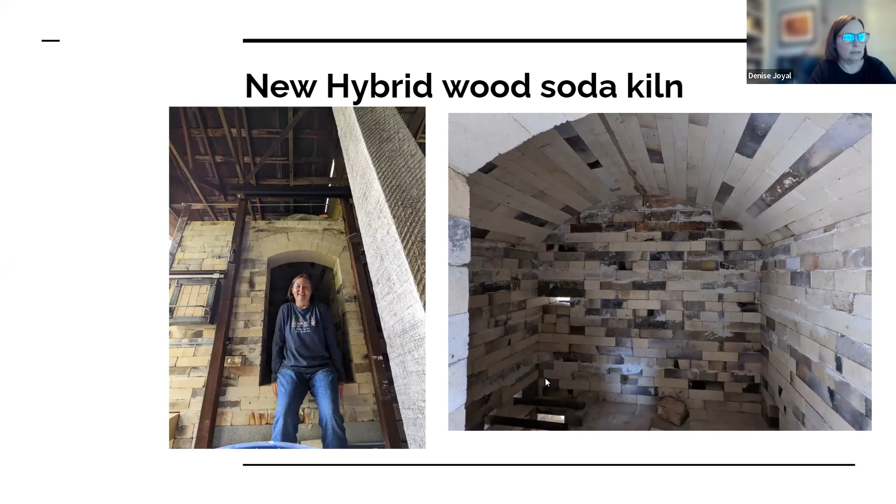The other thing I do here is because when I had a soda and wood fired kiln a little while back that was smaller than this one, I had to build channel extensions for the propane, since most of the ignition was happening towards the back of the kiln in the chimney. Propane needs oxygen to ignite, and it needs a little bit of time to fully ignite, so to get the most out of the fuel, you need a fairly long path to get that flame to fully ignite.

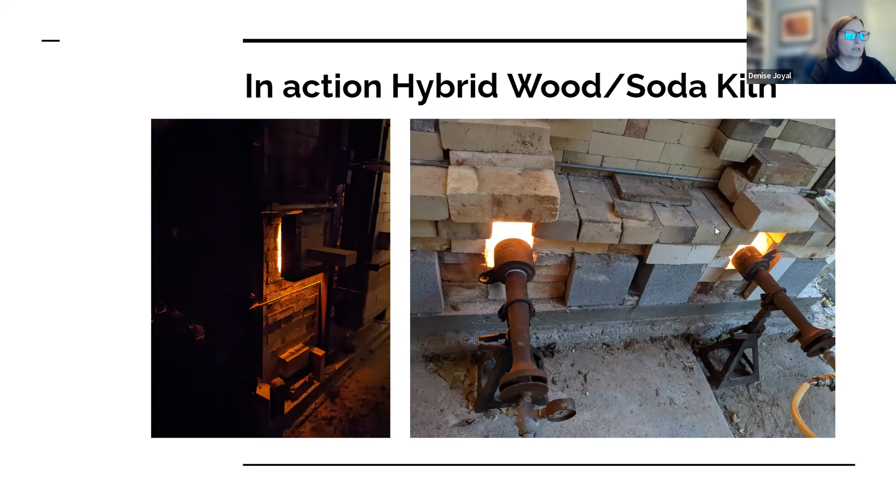A lot of people get excited when flames are coming out of their chimney, but I feel like I'm just putting money and carbon into the environment. I'd rather use the fuel in the kiln itself. So that's kind of the theory behind this method.

One of the things I wanted to show you was the CO2 workbook that I created as part of an article I wrote some time ago. This is an Excel spreadsheet, and if you request a copy, I can send it to you so you can use it yourself.

Essentially, this tells you how many pounds of CO2 result from a kilowatt hour, a gallon of gasoline, a gallon of oil, a gallon of propane, a cord of wood, etc. You can put in the amount of propane you use and the number of cords of wood or whatever, and find out what that number is.

For example, I have that calculation of 12.8 for one gallon of propane. So if I used 50 gallons of propane, that's 640.5 pounds of CO2. I'm adding that to a cord of wood, since that's about what my kiln used in my last firing. So that's my CO2 output, and then I divide it by my cubic feet of stacking space so I can see my carbon usage per cubic foot.

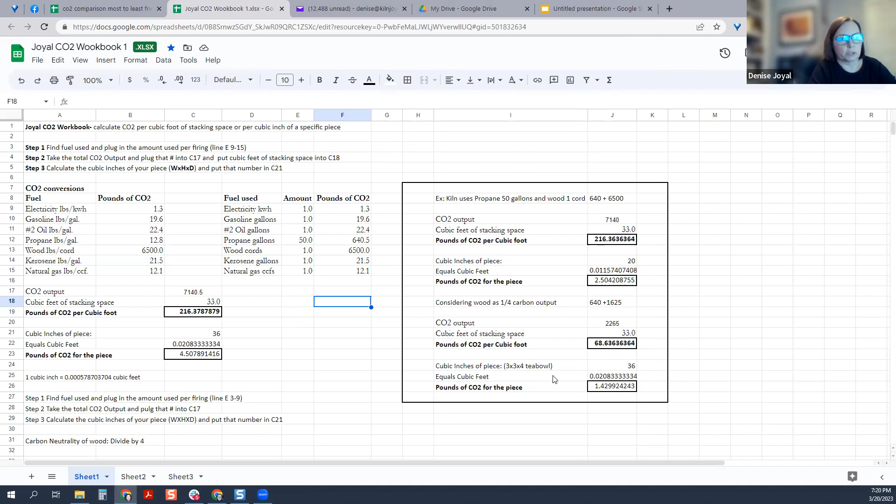It would be my hope that as I continue to fire my kiln, I can refine and do things to help improve the fuel usage and still get the results that I enjoy.

I also have a spreadsheet from my article in Ceramics Monthly, and I'm sure Yuliya can share a link for that as post-presentation information. You can see here for each firing, different potters that I interviewed, their cubic feet of stacking space, whether wood is carbon neutral, what it costs to fire the kiln, what types of fuel they're using, and the cost per cubic foot.

This will give you information on different kilns and their costs and carbon footprint. You'll see here it costs $1.03 per cubic foot to fire an electric kiln. This was a few years back - kilowatt hours may have gone up since then.

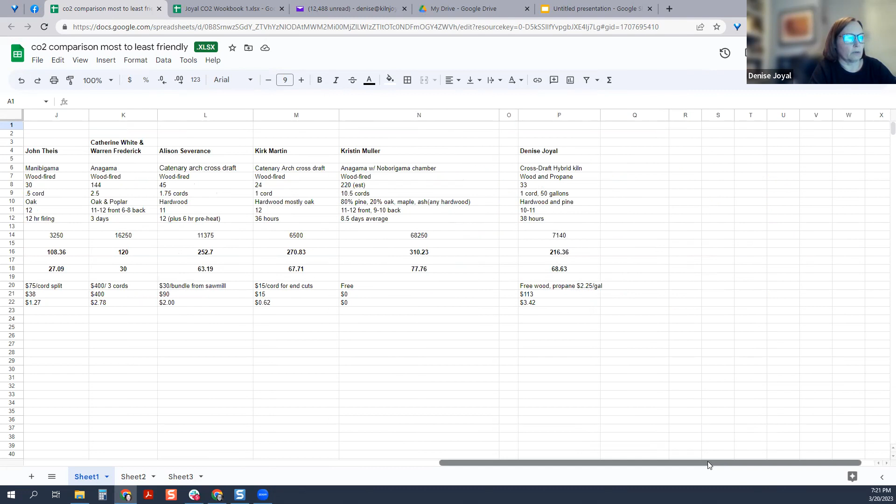But you can also see that some of these kilns are more carbon friendly than the average electric kiln, so you may look to some of these methods to determine if that's a type of firing you want to do, and how you could be successful with it. It keeps going over here to my current one, which again I want to tweak as time goes on, but it'll give you a feel for what the range is.

Are there any questions on the calculations and how these were come up with, or anything else?

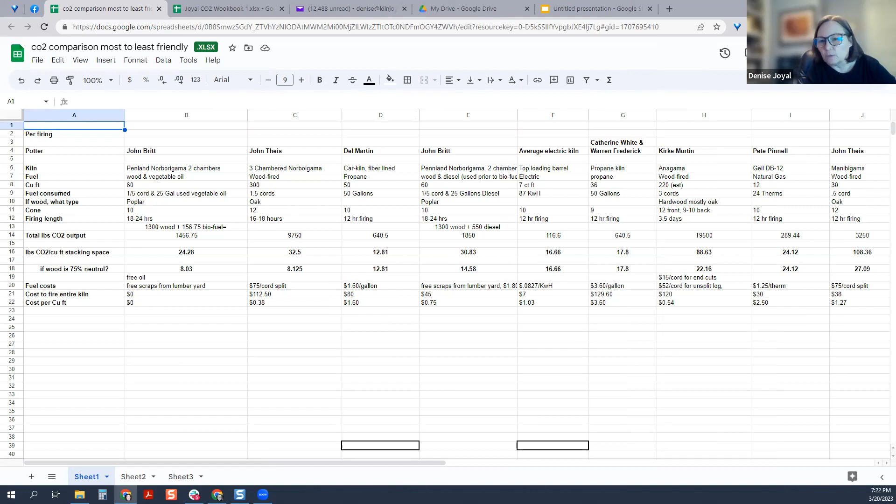Oh, I let people in as I was going. Ah, wow, so smart of you. I usually cannot talk and manage at the same time, but you're much better at that. I saw them pop up, so I let them in.

Okay, so people, if you have questions, please write them in the chat. And while you are thinking about that, I have a question. So Denise, you said that you calculate wood as being 75% carbon neutral. I'm just wondering where this number comes from. Is that more like an intuition, or is it backed up with any articles?

Yeah, one of the people I consulted when writing my article was John Britt, and we had a conversation about where we might put that number. I wouldn't say an environmental scientist gave it to me, but John and I talked about what would make sense. Some people were saying it's carbon neutral because it puts out the same amount of carbon whether it decays in the ground or goes up in smoke, but we felt that was unfair because burning pushes that to happen more quickly. So trying to find some fair calculation, that's kind of where we landed.

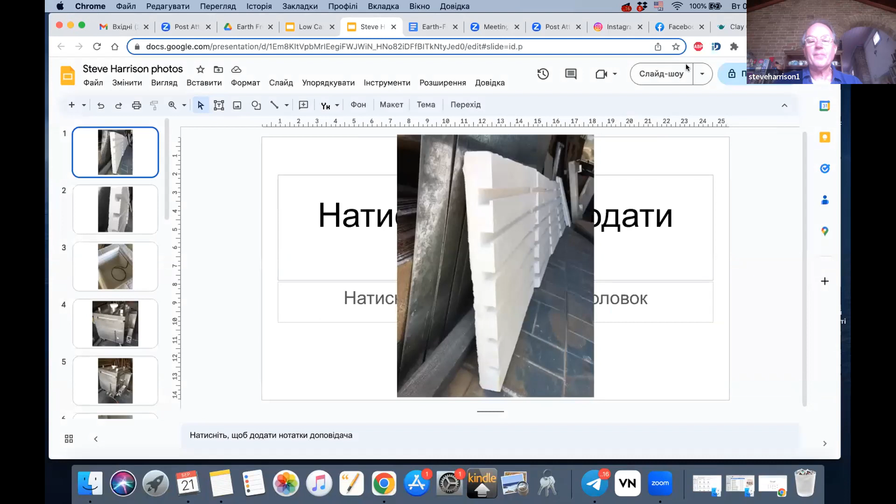I'm Steve Harrison. I live in Australia, in New South Wales, about a couple of hours south of Sydney in the Southern Highlands. I've been here 47 years on 3 hectares, about 7 acres, half of which is forest. Since 1976, we've been using the wood that comes off our own forest, and we've had solar on our roof since 2007.

Our electric kilns fire on solar with the addition of a battery. We have the wood kilns, a Bourry box kiln, which is fairly clean firing—I think it's cleaner than other types of firebox. We have solar electric, and we have a portable wood kiln. The little portable kilns fire off branches that the trees drop.

So with these we don't have to worry about seasoning the timber. These are dead branches and they're dropping all the time, so we have to pick them up so we can mow the grass to reduce the fire hazard. We collect those branches and use those in the firing. I've called it vegan wood firing, in the sense that no trees were harmed—we didn't chop down any trees, we just pick up what the tree sheds.

So this first image you can see here is from the electric kilns that I built. This is a ceramic fiber board, and I've milled it out to make grooves for electrical elements. Have the next image, please. There's a close-up—you can see it has a little retaining wall to keep the wound elements inside the wall. Next one.

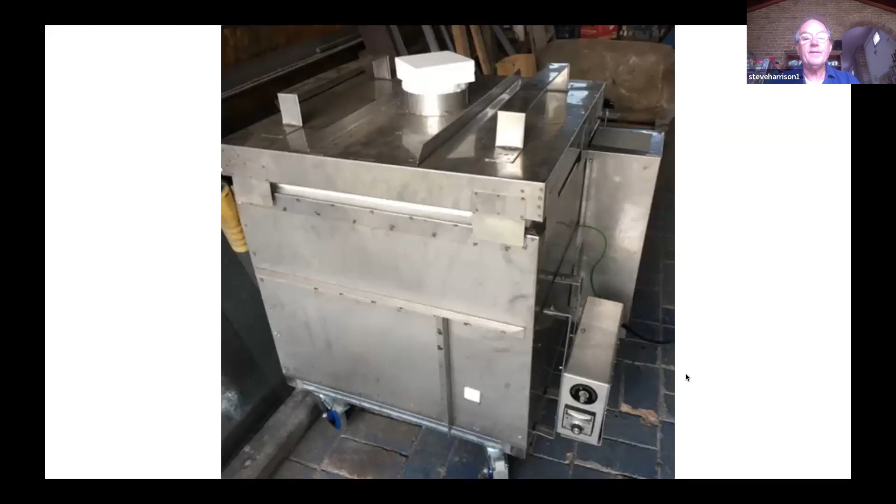And here it is with its lid on and its controller fitted. Now, you'll notice for an electric kiln, it's just a little bit different in that it has a chimney at the top with a square block as a damper, and at the bottom left-hand corner it has a little square hole, where I fit a pilot burner, just a very small 20 millimeter pilot burner. There's one on each corner diagonally opposite.

So we fire the kiln on solar power. It goes up to 1,000 degrees on solar, and then I pull the little plug out and fit the pilot burner and light it. We use LP gas to create the reduction atmosphere, but not to fire the kiln. So in this way, we're firing on solar but using LP just for reduction—that takes around 400 grams of gas for a firing in this 8 cubic foot kiln.

So I use a 9 kilo barbecue bottle, one of those you pick up from the local service station to put on your barbecue. That gets about 20 or 25 firings out of one bottle, so it's a very minimal use of LP gas. LP gas is a fossil fuel, so I'm trying to keep it to the absolute minimum. This is one of the answers I came up with to try and minimize my carbon footprint, using solar for all the heating and just that small amount of LP for reduction.

Now, my friend Len Smith built a kiln sort of like this, and he went one better, using little tiny slivers of wood to create the reduction between 1,000 and 1,300 degrees. That was a pretty good idea—I tried it, but only did one firing, because spending 3 hours sitting there putting tiny slivers of wood into the hole every 5 minutes was pretty boring. Exciting when you first start, but after a couple of hours the fun wears off. So I was happy to just let it run on propane, and it worked reasonably well. Can we have the next slide?

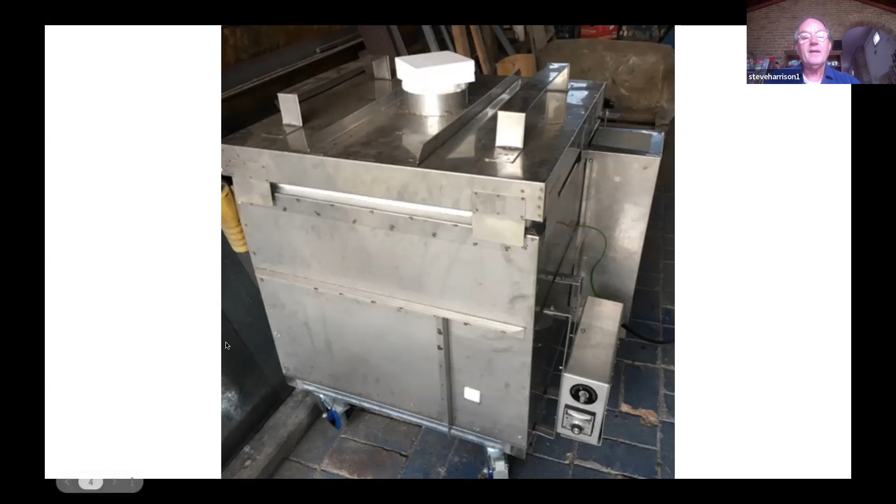And we should see there's the burner being fitted at the bottom. It just clips on - I made a little mounting so you can clip it on and off when you want it and when you don't. And the next one, a close up with the little burner, it's got a safety switch in case it goes out, and it's all completely legal and properly fitted.

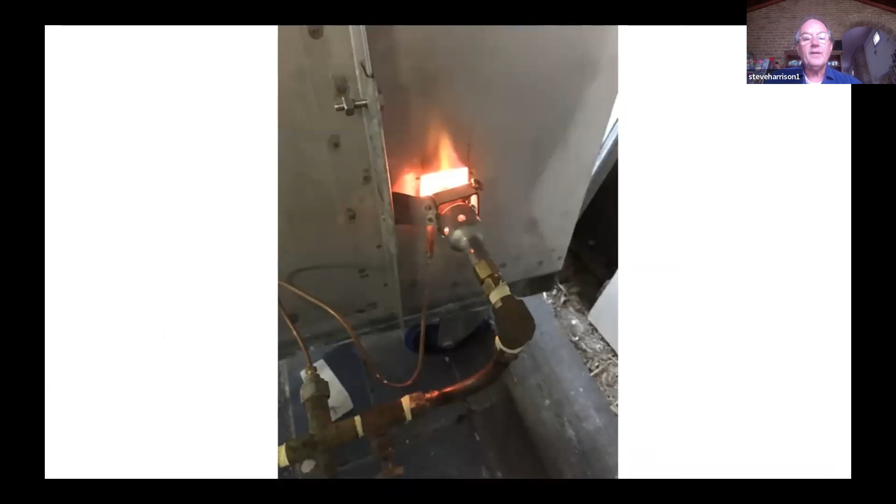And the last one is a picture of the flue here. I put a little sheet of fibre over the top of the chimney, and you can see the flame coming out there. You can damper it back by putting a little tile over that and cutting it back more. I did various experiments with slightly higher and lower pressures, and found around 5 kPa off the pressure gauge is about as low as my gauge can sensibly read - any lower and it's not accurate. So it's about the lowest possible setting for pressure, and a very low volume - about 400 grams of gas, more or less.

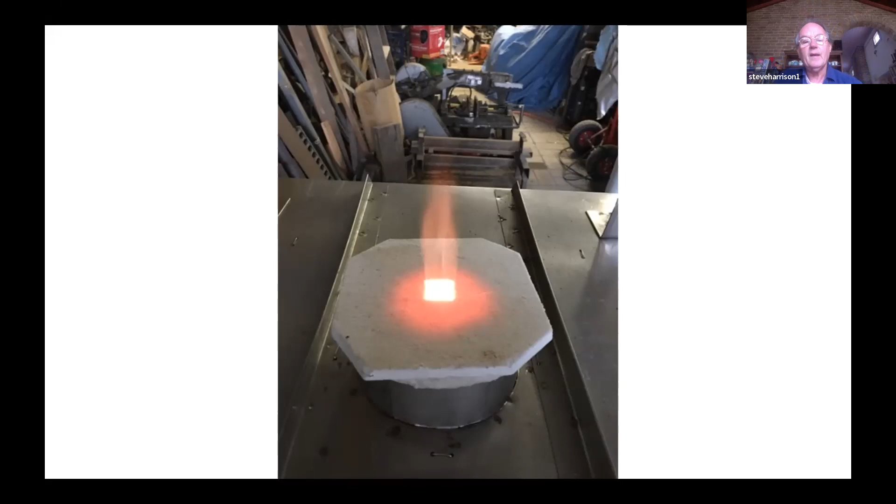I think there's one more. Okay, no, there isn't. Okay, well, this is now changing to the little portable kilns.

These are the little kilns that I built. I originally started making these kilns on wheels when I worked at an art school, and the administrator said we couldn't have any fuel firings for some reason. I don't know why - it's an art school, you should be experimenting.

So I built these little kilns on wheels. I called them guerrilla tactics firing. After 5 o'clock, when the administrator went home, you could wheel it out, do a quick firing, finish by 9 before the college closed, and wheel it away, and no one ever knew.

That was very popular with the students, particularly because they could imagine they could actually own a kiln like this - something they could afford, and could realistically say they could do themselves at home. The great big industrial kilns the college bought for firing most of their work are just out of reach of most students when they graduate - they don't have a spare $30,000, $40,000, $50,000. So these little portable kilns were very popular.

If you fire to stoneware in 3 hours - that's the stoneware reduction firing - you only need 1 wheelbarrow. But if you go for 4, 5, or 6 hours, then you'll need the 2 wheelbarrow loads of wood. Can we have the next slide?

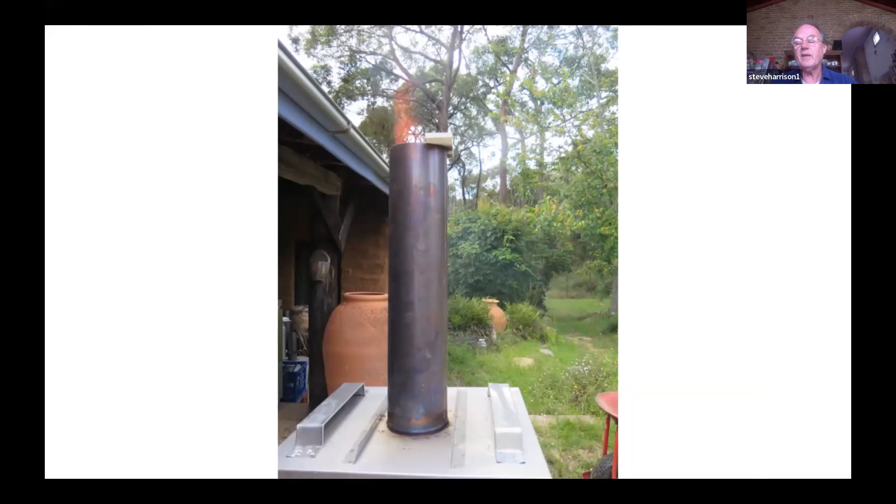So there's a little bit of flame coming out there - this is in the reduction phase. You can see there's a tile on top of the chimney; we've put a little brick sliver there, and you can damper the chimney back to get more intense reduction if you want, and to slow the kiln down. If you want to go for, say, 5 hours instead of 3, you have to slow it down by closing off the damper a little bit. Next one.

Well, that's more of the same. Next slide. Okay, well, yeah, sorry, these are a bit duplicated. Next one.

Stephen, I'm afraid that's all I have. That's it. That's okay. I thought there was one that was a bit more flame. Maybe I've lost one, sorry if I did.

So in summary, what I've got here is a 2-chamber Bourry box kiln for stoneware firing, fairly clean firing, because the Bourry box is the cleanest sort of firebox you can build at the moment. We have solar electric, and we have portable wood.

So we're fairly reliant on wood, but we have our own forest that we've managed for the past 47 years. We only pick up dead wood and use dead trees. So there is some carbon being put into the atmosphere, but it's carbon from the atmosphere, so ultimately it all goes back given time.

We've had solar since 2007, and we haven't paid an electricity bill since then. We've been self-reliant for electricity since then, and we've built it up over time. We started when photovoltaic panels were more expensive, with 3 kilowatts, then went to 6, then added another 6, and now we've got 17 kilowatts altogether, and 2 batteries.

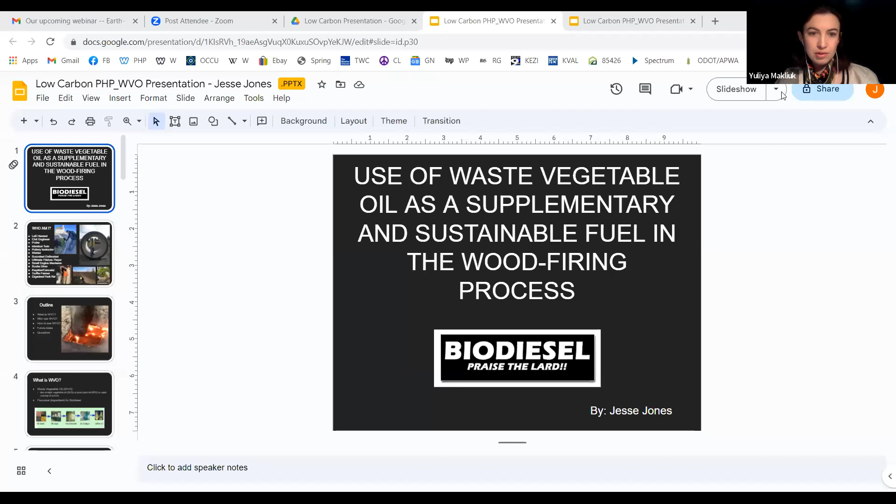Okay. All right, thank you — can you hear me okay? Yes, yes, perfectly.

Hi everybody, thanks for joining us today. It's nice to see a lot of my friends in the audience too, so thanks for coming. The title of my presentation is 'Use of Waste Vegetable Oil as a Supplementary and Sustainable Fuel in the Wood Firing Process,' but the shorter title is 'Biodiesel, Praise the Lard.' I think that translates into some languages.

So today I'm going to talk to you, starting with who I am. I'm a left-handed civil engineer, a potter, and half of an identical twin set, so there's a clone of me out there somewhere in the world. I'm also an erstwhile pottery instructor, welder, succulent enthusiast, ultimate frisbee player, small engine mechanic, scuba diver, kayaker, canoeist, truffle farmer, and an organized pack rat. There's some pictures of me doing my other activities here on the right.

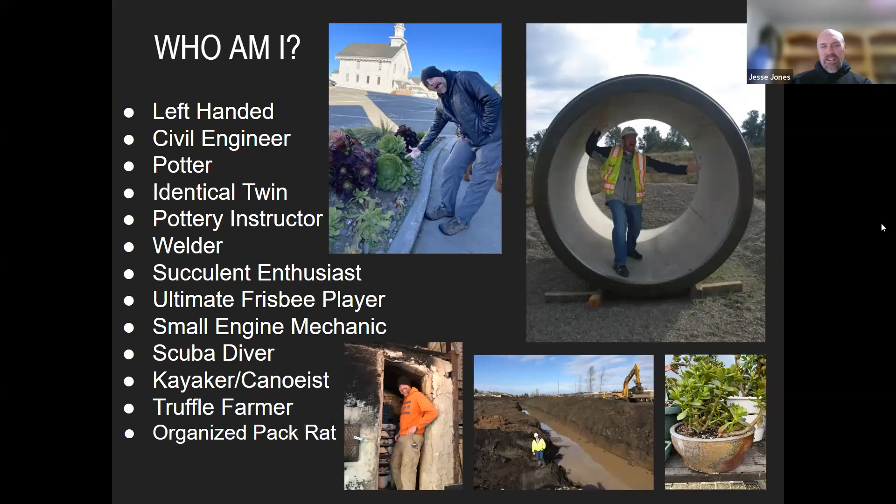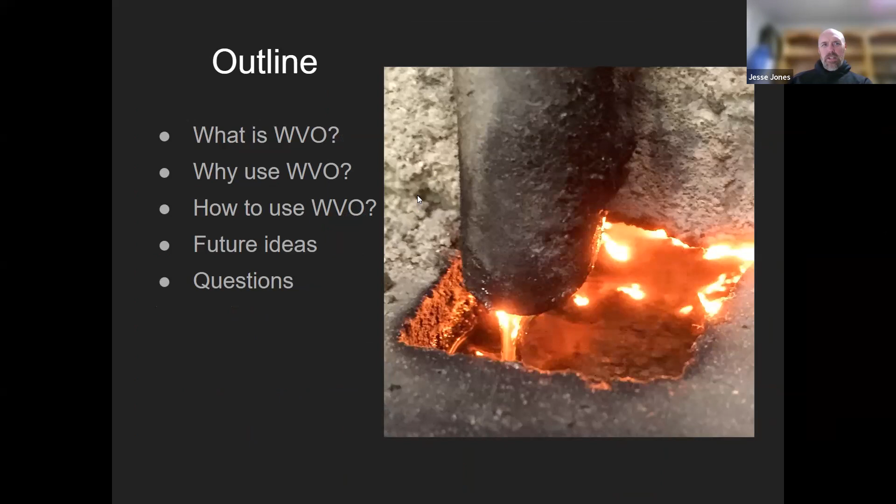So today I want to talk to you about what WVO is, why you use it, how to use it, future ideas for its use, and then I'll happily take your questions.

So what is WVO? WVO is waste vegetable oil. You'll also hear it referred to as SVO, straight vegetable oil, PPO, pure plant oil, or UCO, used cooking oil. It's all the same stuff—it's what comes out of the deep fryer when we're done with it.

You'll also hear the term biodiesel. Waste vegetable oil is a precursor or ingredient for biodiesel—it's the feedstock. They do a slight chemical change to it, and then it can be turned into biodiesel. What we use is waste vegetable oil. We've also burned biodiesel; it's the same, just more expensive if you have to buy it.

Briefly, the process for oil is: it comes from seeds of plants, gets pressed, extracted, and refined, then we eat it or use it. What we're using on our side is the waste—once it's used and left over, we get it before it goes elsewhere. If we don't get it, it often goes to a refinery and gets turned into biodiesel.

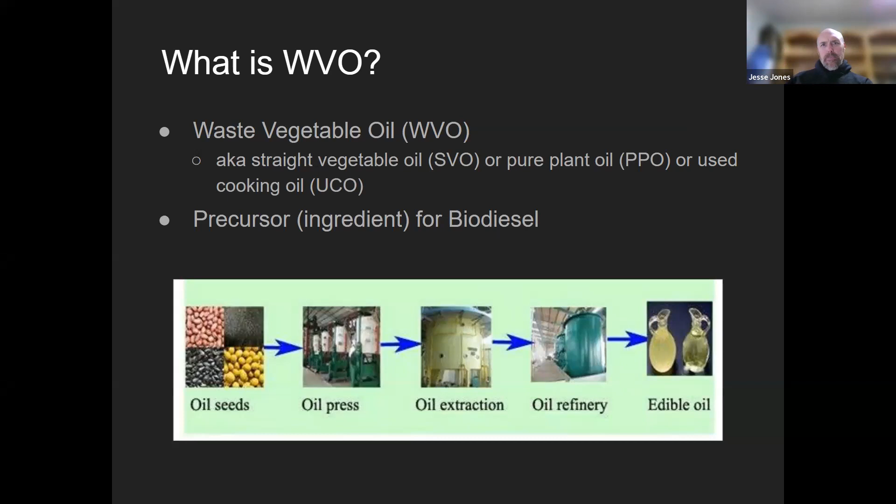So why do you use waste vegetable oil? Why would you use it? I'll give the pros and cons—it's not all great, so I'll definitely share our experiences.

We like it mainly for the ease in reaching top temperature. We fire all of our kilns with wood primarily as the fuel. We don't even candle anymore—we used to candle with propane a little, but not now. We do a wood, campfire-style hearth fire, firing to usually around cone 8, and then we start using the vegetable oil.

Reasons we like it: it's labor saving—you're not putting as much wood in the kiln, so it's physically easier. There's also less open door time. When you open the stoke door to put wood in, you let oxygen in and generally colder air. With the way the biodiesel or veg oil is introduced, there's less open door time, so you don't get those temperature drops.

Probably the best advantage of using it is the ability to change and maintain the atmosphere inside the kiln. You can very easily change from oxidizing to heavy reduction, keep it in heavy reduction, and tune the reduction based on the amount of oil you're adding. It's very responsive—within seconds of making an adjustment, you'll see a change in the kiln. So we like the atmosphere control there.

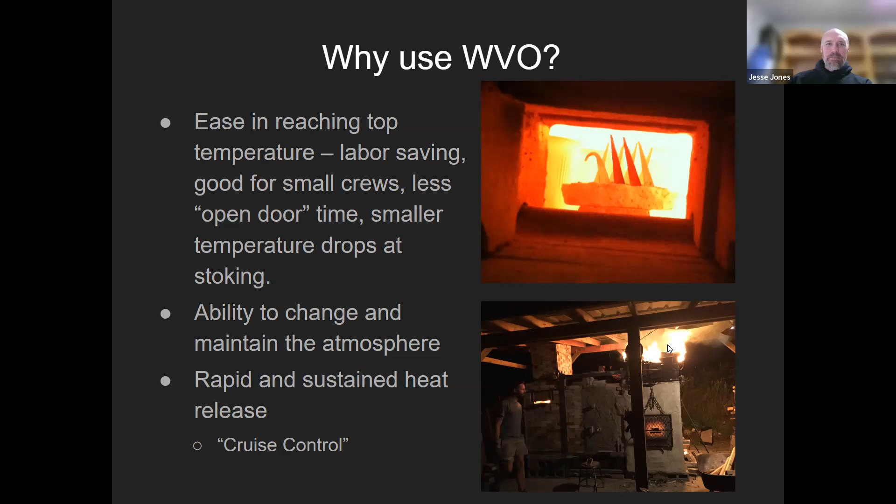All right, so some advantages of why to use waste vegetable oil: there's a decrease in unmelted fly ash.

So at the end of the firing, instead of dropping in wood and kicking up coals or having embers fly out of the pots, you can really minimize that and just be burning this volatilized liquid fuel.

It turns into a vapor, so we find that it's basically polishing the pots at those high temperatures. The systems that I've worked on are very economical, very cheap, very simple, really accessible to all.

There are a lot more complicated burners, with forced air and atomization, but again, they're more efficient.

They produce more heat. Ours is like a low-tech DIY system, and it allows us—it's fun to play with, and as the topic of this presentation, it's a supplemental fuel.

We'll get to some of those qualities here in a second. It's the benefit of a liquid fuel, so that means it's coming out of a tank or a bucket.

You can valve it, meter and control how much goes in, and measure how much goes in. So it's a very quantifiable thing, and it's helpful for research and repeating.

So I've got 60% battery.

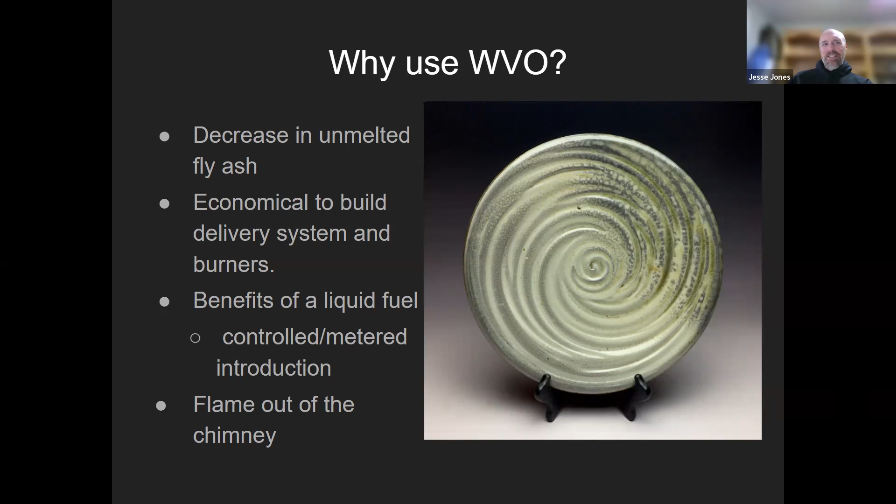Firings—okay, and the last benefit is that you can get flame out the chimney if you want to, like send a signal to your neighbors. It's fun.

So again, the big picture of why you'd use it: the sustainability aspects, a much better substitute for petroleum-based fuels, and it works like petroleum-based fuels.

Like if you were burning oil, kerosene, or fossil fuel-based oils, this is a direct substitute. You could pour motor oil down our burners and get the same effect, but biodiesel or veggie oil is a lot better.

Renewable and locally available, so it's in all the communities. Every fryer, every food cart has a fryer, so it's definitely around there.

If you start asking around, go to restaurants and ask what they're doing with their oil, chances are that they might give it to you.

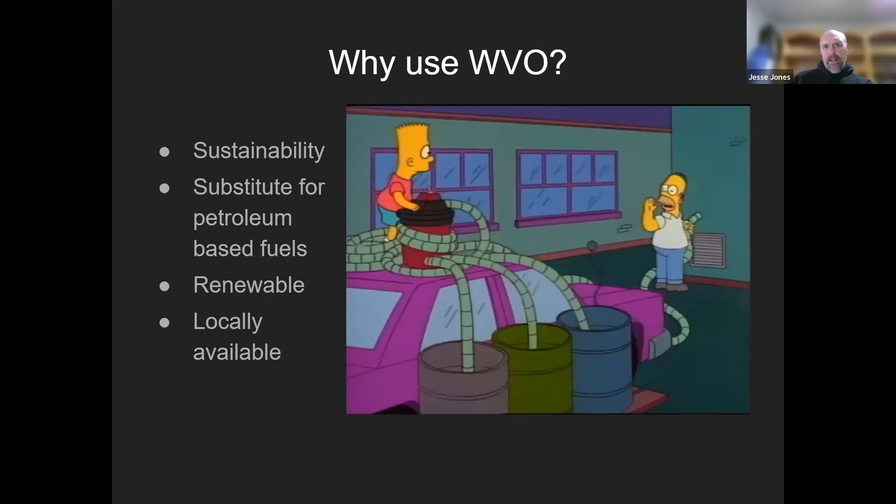So there was a question earlier about the heat relation, some quantitative numbers here. This is what I've been able to find for waste vegetable oil, in English units, but the relationships are what's more important.

That's 120,000 BTUs per gallon of oil, the rough heat value for waste vegetable oil. That means a cord of softwood is equivalent to about 100 gallons of waste vegetable oil.

And a cord of hardwood is equivalent to about 175 gallons of waste vegetable oil. So that just kind of puts it into ballpark.

When we fire, again, we're not using it as our primary fuel, we're using it as a supplemental fuel. We're burning between 5 gallons and 25 gallons in a firing, sometimes 50 gallons if we're really feeling it.

I think I alluded to this earlier—we used to burn even more of it, but now we've increased our wood acquisition, our wood sources, the mills we get our waste wood from, and we're able to season the wood longer, which has made firing really easy.

We're actually holding the kilns back as they're wanting to go through the peak temperatures, so we hold them back and rein them in. The oil at this point is really just for show or atmosphere change—it's not really for heat gain, but it is useful for that if you want that kind of boost.

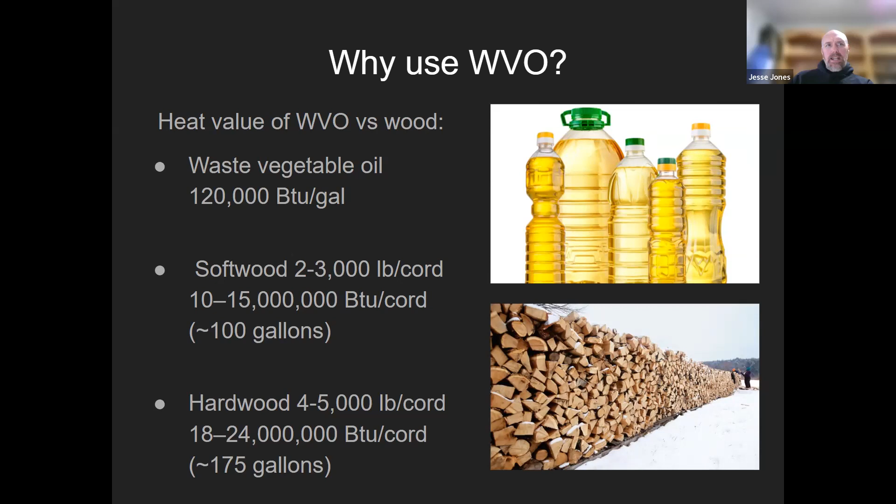So, how to find waste vegetable oil? Like I said, restaurants, cafeterias, food trucks—it's available in every community.

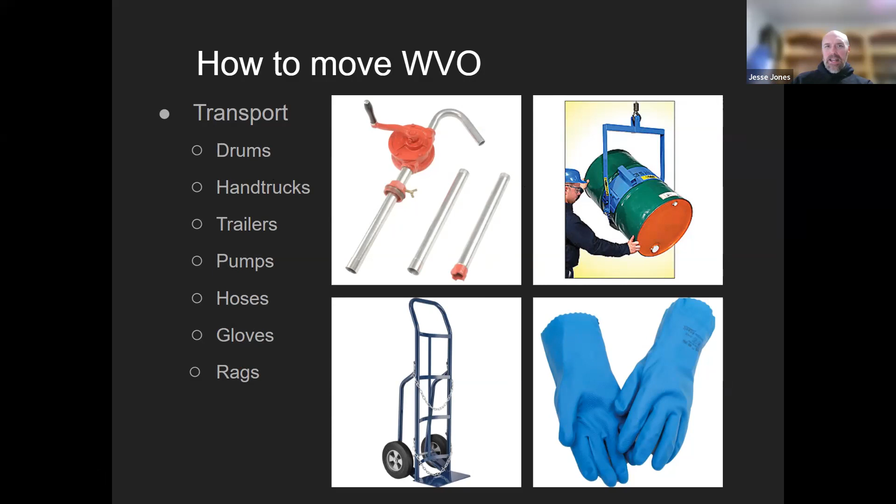You definitely want gloves and rags. It's dirty, or sticky, and that stickiness attracts dirt, which makes grime, so it's not the cleanest thing in the world—that's definitely a negative for it.

Handling it, temperature-wise, warmer is better. Like in the wintertime, it can thicken up and flow more slowly in the lines.

And so it's harder to work with, but you don't always have control over the temperature. So we've even heated up buckets - we'd get a metal pail, pour oil in it, and heat it up next to the kiln before we put it into the bucket, the gravity feed system, to get it into the kiln.

Cleanliness of the oil is important. You'll see in a minute about the manifold system, how it goes into the kiln.

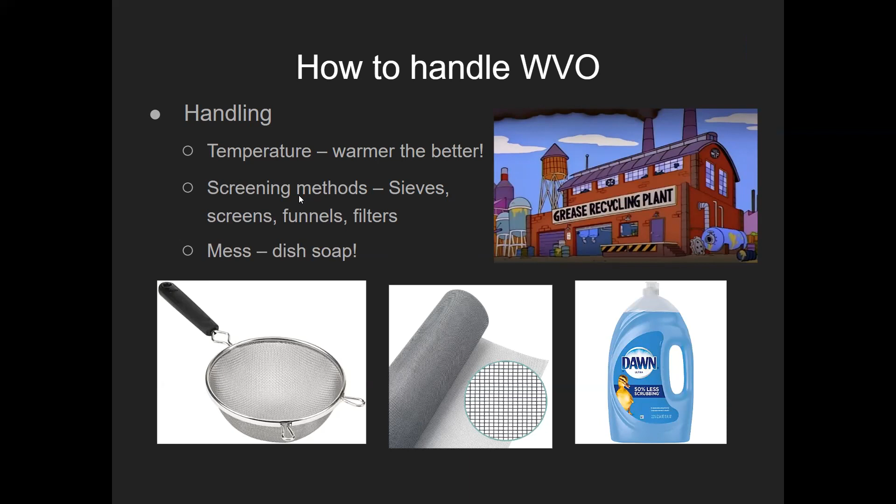The screening method - you kind of want to sieve it, because when you get the oil from the restaurants, it comes out of a fryer and has bits of fries, broccoli, tempura, whatever - it's got food particles in it. It's really important to strain that, or else it'll stack up inside the constriction points in your manifold system. So we just pour it through a kitchen sieve, or a window screen over a plastic 5-gallon bucket, and give it a one-time filter through that. Then it's clean and won't mess your system up.

Dawn dish soap will be your friend. It's a greasy thing, so definitely have soap around to help clean up.

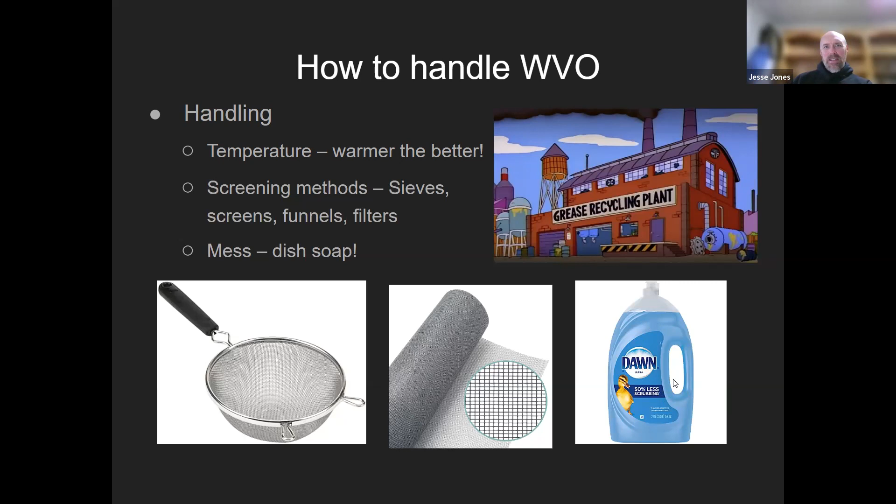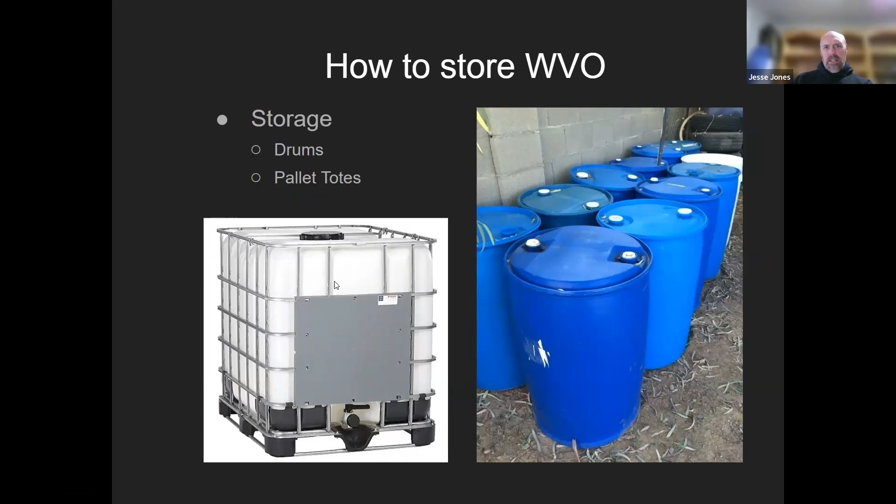That's how oil is commonly bought and consumed by restaurants. It's a 3-gallon cube, usually weighs 30 to 40 pounds, I think 35 pounds. They'll often pour that oil in their fryer, use it for a week or two, then pour it back into the jug and set it out behind the restaurant. If you keep it in these jugs, that's great, because you can lift it, move it around - it's square, it stacks nice, you can store them.

We will literally take it from that cube, put the screen over an empty 5-gallon bucket, and pour the oil one time through the screen - then it's clean in the bucket and you can use it from there. So we've done it all, but if you don't want to mess with pumps and things, just keep it simple - keep it in buckets and bins.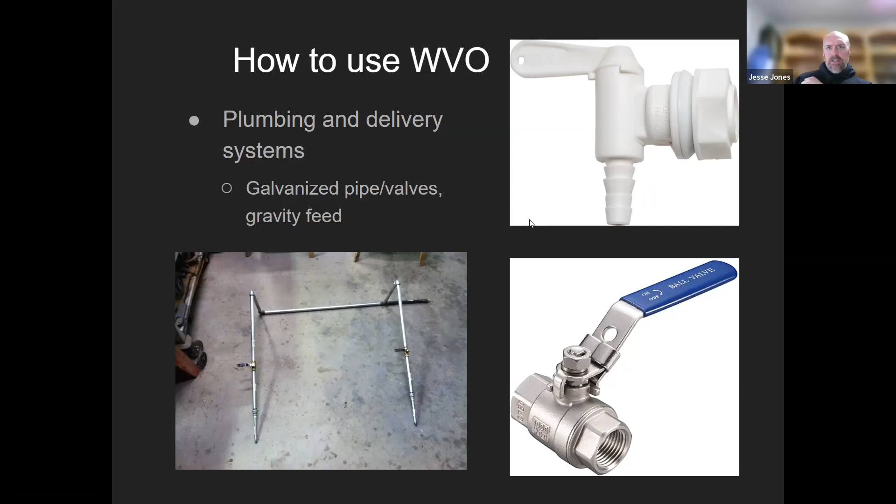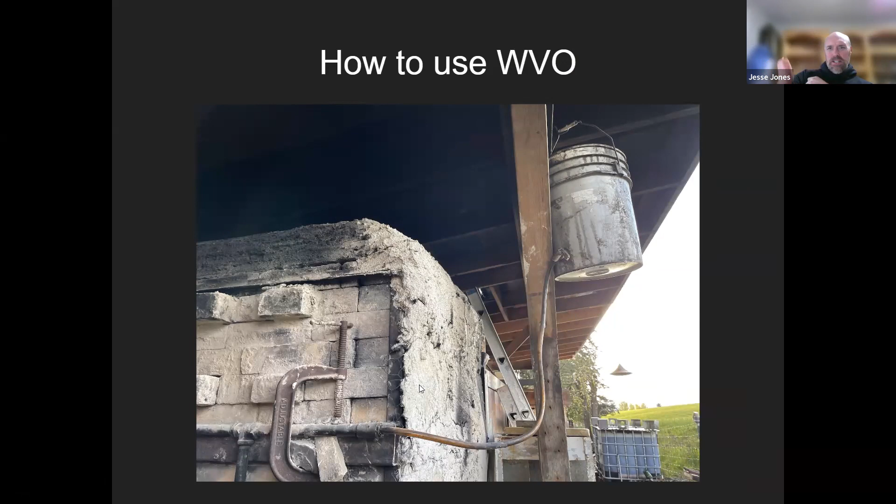Prices have probably gone up a little since I built these, but it's really not expensive to build this kind of delivery system. This is the low-tech delivery system in action: a 5-gallon plastic bucket hanging up, with the big source tanks in the back. You fill this tank up, and you have a little on-off valve here. This is a plastic tube—it was clear at one point, now it's pretty dirty—and then this flows into the manifold system here. I have more pictures that show this, but that's as simple as it gets. It's a gravity feed, a kind of drip system.

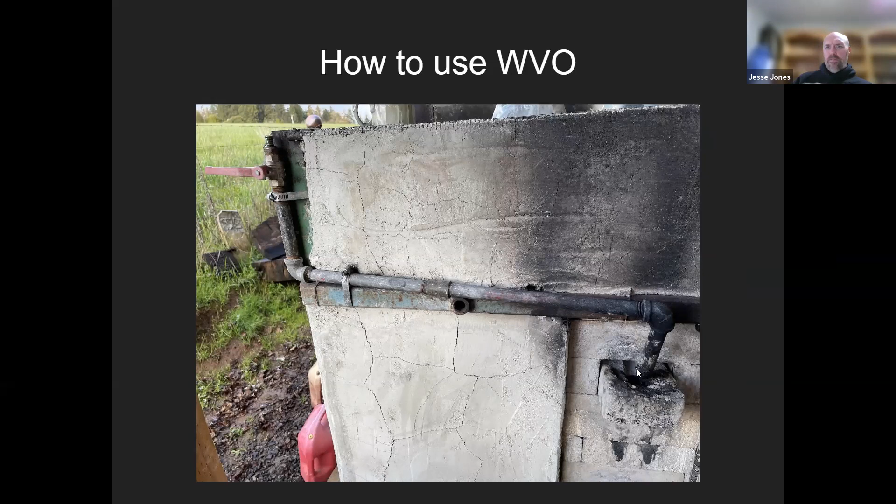This is another one, on the most recent kiln that I built. This is a really simple system. That bucket is up off to the left, and it's just not connected right now, but that tube would come down and connect here. This is your flow control valve, and it just comes around like this, goes down, and then this is the burner right here, and then where it goes into the kiln. So just a very simple system. This is a close-up of that burner—we'll get into better pictures of what the burners actually look like.

As far as methods of introduction for waste vegetable oil, this is that first manifold that we saw, on the front of the soda kiln. That bucket hangs up here on the wall, flows across, gets into the manifold, and then flows down into the burners. The manifold system is kind of the primary—like the cruise control, where you set it and it runs for hours at a time. You keep refilling the oil, but that's a continuous flow system.

We've also experimented with pouring the oil in. What that would do is we'd take a little Dixie cup, a small amount, a few ounces of oil, and pour it directly into the burner, bypassing the manifold system. It's like a little mini stoke of oil—you just pour it in there and it acts like a stoke of fuel.

We've also dipped sticks. This is fun, a little messy, but fun. We take a bucket, fill it about half full of oil, and dip our wood in it. Then we throw the wood into the kiln, and it's fun and exciting with a lot of smoke and fire, but it drips a little oil on the ground, so you have a bit of a mess to clean up.

One method I like using now is what we call pulsing. Pulsing is more like a wood stoke—you're firing the kiln, putting wood in, and every once in a while you skip a wood stoke and come over and turn the valve on for a few seconds, then close it. That fuel gets metered into the kiln over, say, 10 seconds of fuel introduction, and it acts like a wood stoke: it combusts or volatilizes, then combusts, releases heat, and goes out the chimney. It's very interesting—it really mimics the wood, and it's kind of fun. It keeps you active, moving around there.

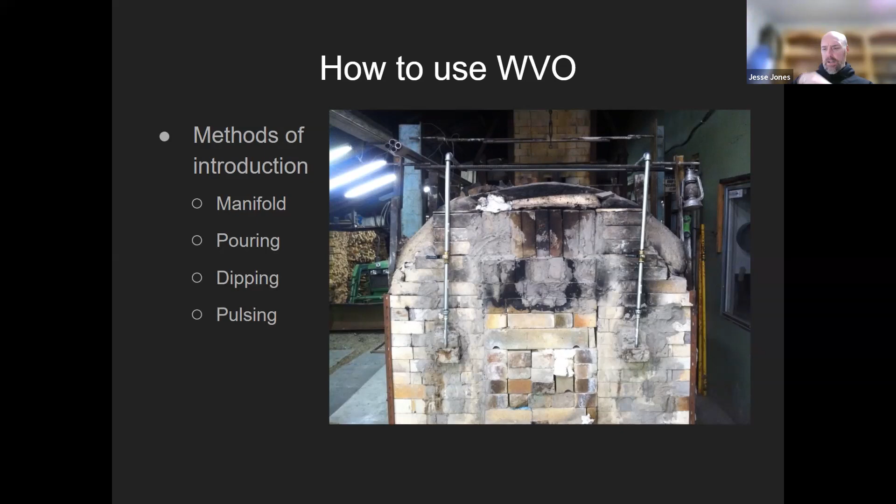As far as these burners, I've done a big evolution of design on them, and we'll get to that in a second. As far as how you put them in a kiln—they're designed just like a normal brick. In US measurements that's about 2.5 inches by 4.5 inches on the end area. These burners are about a quarter inch less than that standard brick size, so they slide right into any brick hole you could build into a kiln.

I tell people, it's great if you can, when building a kiln, even if you don't think you'll ever use oil, just leave a couple of what we call knockouts—bricks that are in there but can be pushed out—so these burners can slide in later. Also, when you're done firing, you can pull the burner out and put a brick plug in. It's really nice to have them; they're hard to put in after the fact but easy to put in when you're building it. So I encourage people to put those knockouts in.

Usually the burners are above the firebox, so the oil can fall off the burners and flow and waterfall down into it. Generally you get better performance if the burners are as high up in the firebox zone as possible, so there's more time for the oil to cascade down. Here you can see it in operation—here's the oil dripping out.

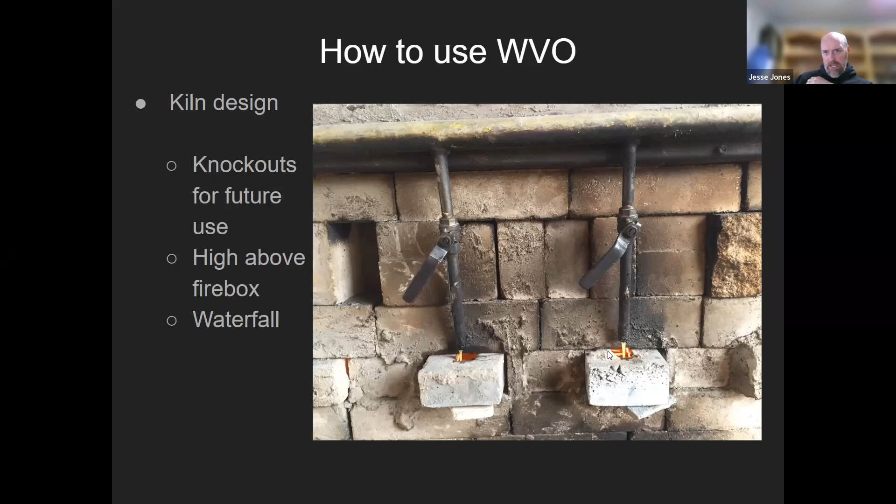Valves are about half open right here, and you can see this has a 2 burner system, and you can see the oil flowing, and that's the glow of the kiln inside there.

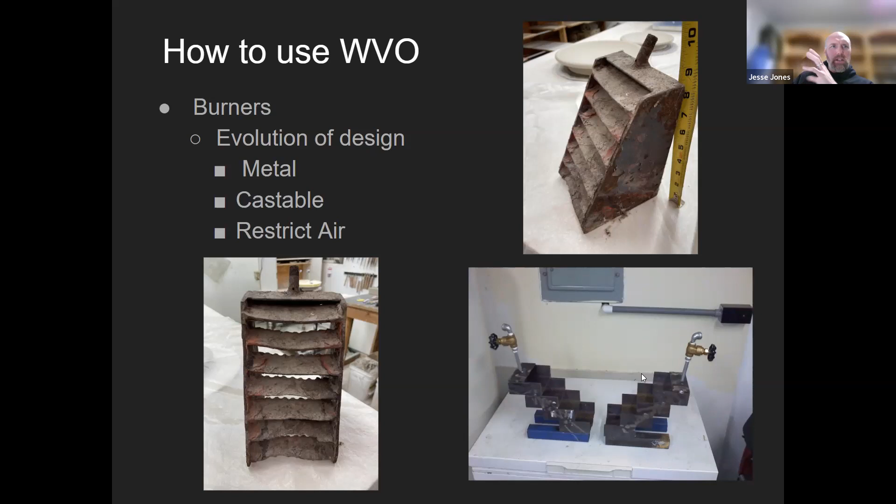Quickly on the burners, we started with these metal burners and big stair steps. So the oil would come in at the top and flow down, and a lot of air would flow through the back. Over time, we just kept refining them, and we kept getting them flatter and flatter. We were basically getting too much air coming into the kiln, and it was really locally hot. We wanted to lengthen the flame out, and so we started making the burners flatter.

Here's an example of a metal one up here that is more of a flat plate burner, and that increases the air velocity, decreases the pressure, which helps oil volatilize more, and it's a much better system to go with as small an amount of air as possible in that opening.

So I started making them out of castable a few years ago, and the nice thing about castable is it's really durable in this environment. It doesn't get consumed like steel, and since they're small enough burners, about 16 inches long or so, they'll fit in your bisque kiln, so you can run them through a castable curing cycle, which really increases their strength and turns them into like a brick. There's a picture here of what the mold or form looks like that the castable is poured against.

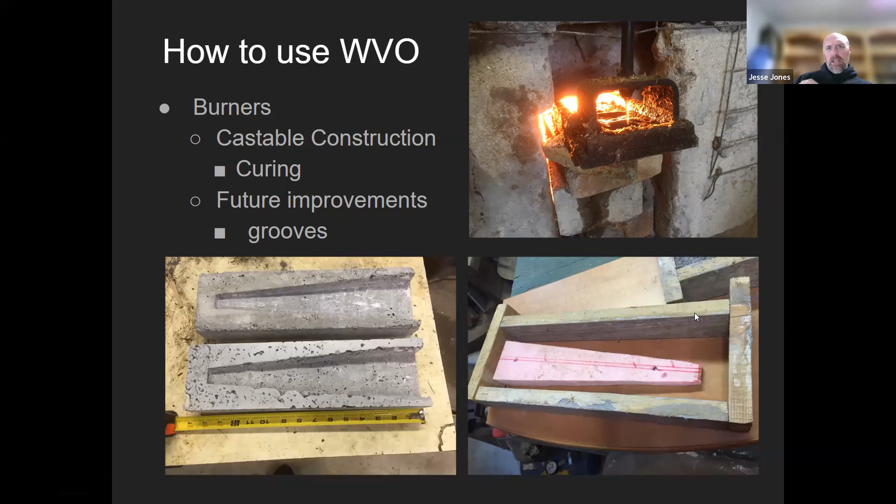And then this one, if it works—not sure if that will work or not—that was just a picture of the burner.

Give me a second, it's catching up.

Yuliya, do you see something's changed on my end? No, not yet, I just see a blank screen. Unfortunately. While we're at it, I just wanted to quickly ask if there are any questions in the chat, because I don't seem to see any. Maybe it's just something on my side, or maybe people are not ready with their questions. Oh, now I can see. Okay, sorry, go on, Jesse.

Okay, I am just getting back to the presentation. I think... yeah, I just went to the wrong slide. So, okay.

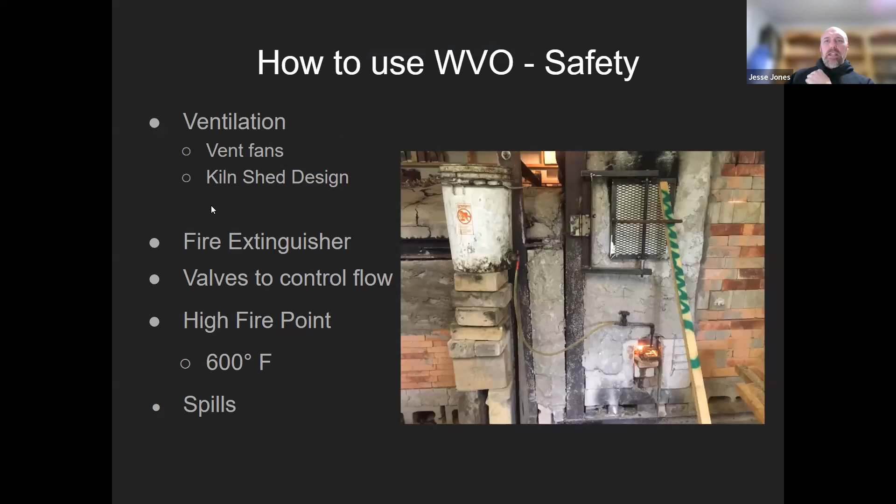This is another system here, same idea, the bucket with the valve flowing into the burner. This is down low in a kiln, and this was kind of a we don't like this as much because the oil tends to get down on the floor of the kiln. There can be smoke associated with this depending on how much oil you're adding versus how much air you have coming in. So having a ventilated kiln shed, or if you're designing a kiln shed, just make sure you have a nice way for the smoke to get out.

Good to have a fire extinguisher around. Definitely have valves to control your flow, like a valve that you can just stop in case there's a fire, or if you want to stop the oil, have a way to shut it down.

The good news about veggie oil is it has a high fire point, so that means it's not explosive like gasoline. If you throw gas on the ground and put a match on it, you have a big problem. Oil, you can pour on the ground and put a torch on it and it wouldn't light. It would smoke after a while, might burn, but it's not at all flammable like more volatile fuels are. It's more slippery and stuff, so if you get a spill on the ground, you throw sawdust or wood ash on it, mix it up, and then scoop it up and take it away.

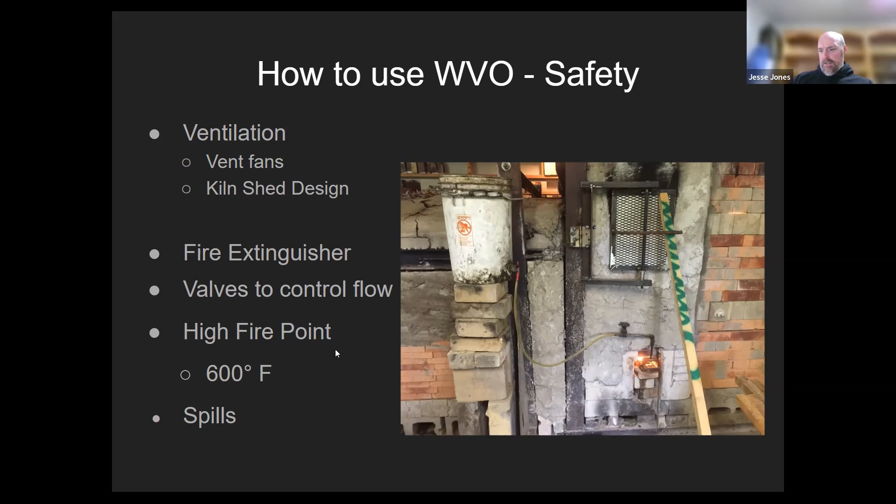We have a couple future ideas. One is a parallel water introduction system. Basically, the manifold that we built for oil—build a parallel manifold of the same style and have a bucket of water. If you could trickle water in at the same time, that water will volatilize to steam, and we theorize that would help the oil disperse better in the kiln too. That's just an idea we've been playing with. We're very interested—we have actually firings coming up in the next month or so to use the veggie oil in that system for reduction cooling purposes.

So this is a type of subset of wood firing. We think there's good potential there for really being able to control the atmosphere of the kiln as it cools. I'm continuing to refine the delivery systems and making little improvements here and there, and we're also interested in using these burners, or using our kilns, in different ways.

Instead of firing strictly with wood, we've thought about using wood up to like cone 8 or 9, when we usually start using the oil, and then really stop using wood and continue just firing with oil because all the bricks are hot and the firebox is hot. And then we can do things like have more glazed work instead of raw clay in there. So we have a lot of ideas for the future, and I think there's a lot of potential there.

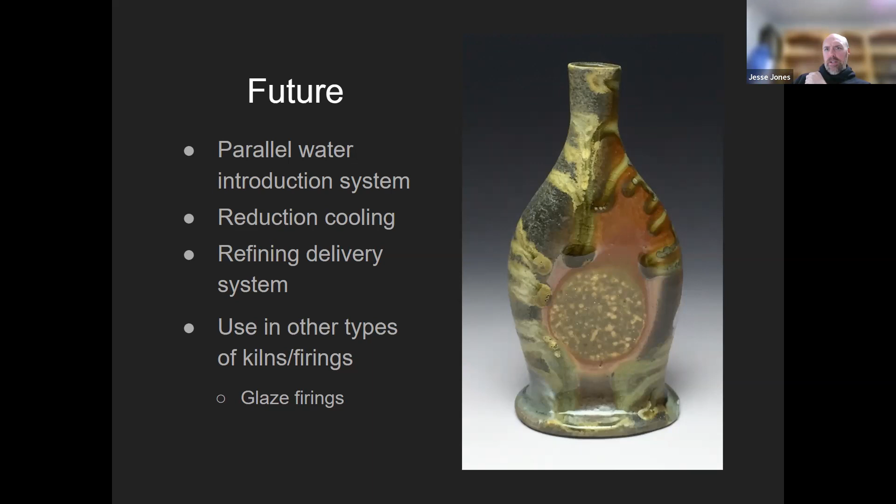There are a couple of articles and resources out there for people interested in this. John Britt wrote an article in 2003 about veggie oil firing, waste oil firing. And then I wrote another one detailing our experiences in the April 2017 issue. My article is available on my website, as are the burner plans.